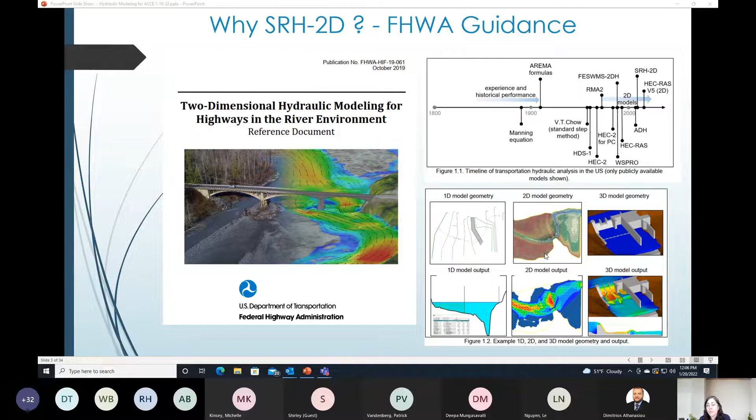So it was recommended that 2D modeling be used for bridge projects. And then in 2019, the DOT, when they updated their hydraulic manual, recommended to include 1D or 2D for fish passage and bridge projects. But under their hydraulic analysis in Chapter 7 for fish passage, they actually require it.

So if you want to work on fish passage projects for the DOT, you're probably going to have to get some training with 2D modeling. And there's an NHI course, which I highly recommend. It's a 4-day course to be able to go through to learn a little bit more.

So this is why it's so important right now than it was 5 years ago. Just the push, and it's just a better way of looking at river systems.

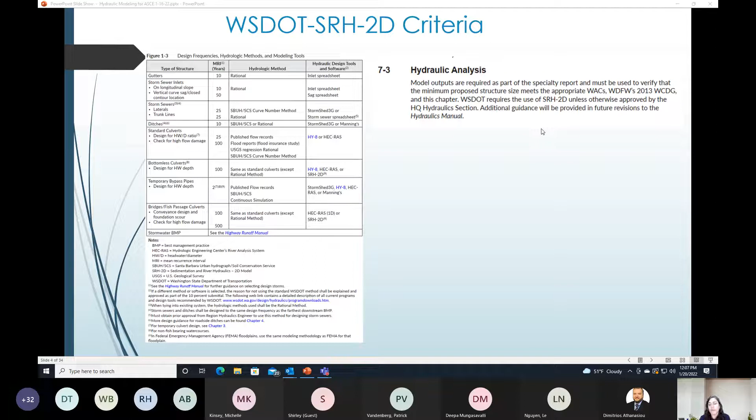So let's take a look at an example project. This bridge project that we're going to look at, we're going to derive some water surface elevations and scour depths using the program. We're also going to check vertical clearance and channel migration zone criteria. There's other components that you typically look at when you're doing a bridge project, but I'm just going to focus on these criteria. This project crosses the Touchet River,

and it flows south to the Walla Walla River. So just kind of some dynamics of the basin area. The existing bridge was built in 1914, and it's 115 feet in length. And the other thing that we know, it was identified to be structurally deficient, and in the bridge inspection report, it was determined that the bridge had a scour critical code of 3.

So now this is kind of giving us a background of what the project is all about. And the biggie is the scour critical code 3. What does it mean? It means that the scour limit is at the footing, and it's unstable. Either assessed, being that you can physically see the bottom of the footing, or it's been calculated that it's going to be below.

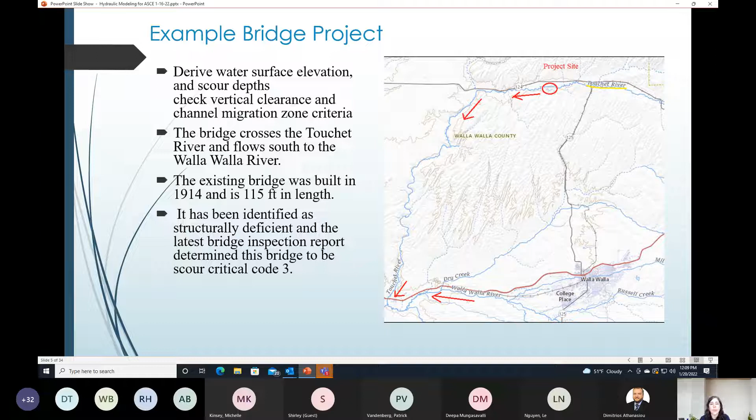So knowing that, something should be done about it, right? Some type of plan of action. So now let's start looking at some bridges or some pictures of the site.

And so we were able to find some archive photos, and this picture here is actually from 1909, before the existing bridge. And so we can see that there's a pony truss structure here, and it spans the main channel. And then we have several bents on either side of the main channel, and then we have a school there. So this just kind of gives us an idea of what was there before the existing structure.

And then we can see where the flow of the main channel, and then we can also see on the right here some side flow that's coming in. So that kind of gives us an idea of what it was before.

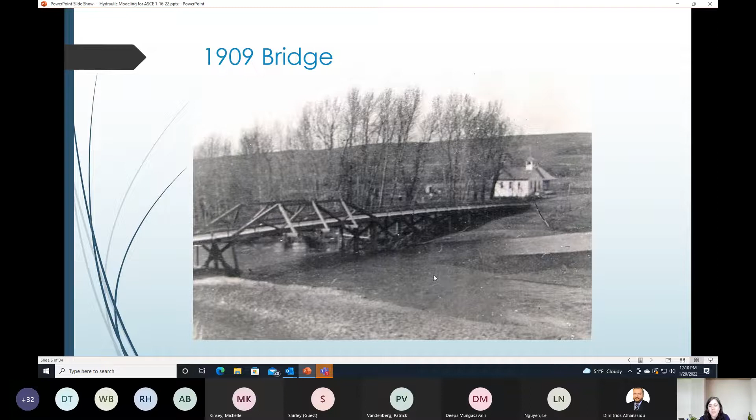Now looking at the existing structure, the 1914 bridge structure, we have a Luten arch now. And it's not as long as the 1909 bridge. The other thing that we see is that the main channel is now, it's meandered on to the where the offside channel was, and this is actually hitting the road approach here.

And so this is a drone shot that was taken of the bridge. And so we're looking at just the components now of the river, of what it looks like now compared to back in 1909, which was great when you can find historical photos of your project site.

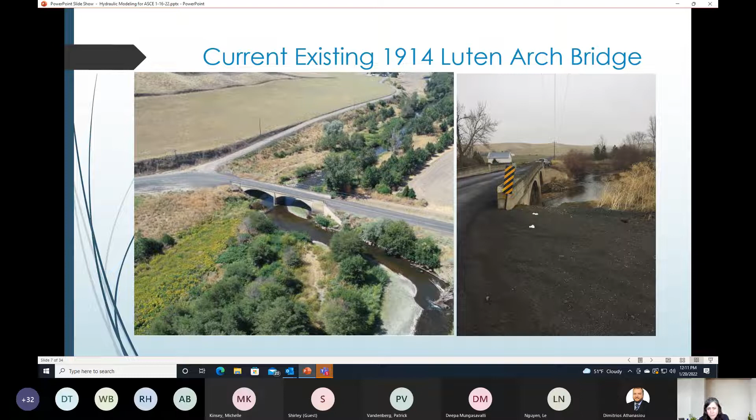The photo to the right here, we're looking upstream, and you can see where the existing school building is, and some buildup of riprap, the bank, and then we got the center pier there. So looking at it, we're just kind of gauging what the site has, and so we're looking at our site conditions. And so what we're trying to do is we're trying to set up, okay, what are we going to need for our modeling?

And so one of the things that we need to look at is, okay, site conditions, right? How big of the basin area are we looking at here? For this particular project, this basin area is approximately 497 square miles. And then we're looking at, does it have any gauges nearby? Does it have a gauge at the bridge site? How far upstream, downstream is a gauge?

The other thing that we look at is finding information about FEMA. Do we have the flood insurance rate maps? What year has it been, do we have an updated year that the flood maps have been defined? And so here in this aerial shot, we were able to overlay the FEMA map boundaries for the 100-year to see how wide the floodplain is.

And you can see where the little school is at. So it has a very wide floodplain for this river system. So again, we're gathering information for our project site. So when we're doing our modeling, we can take into account all these considerations.

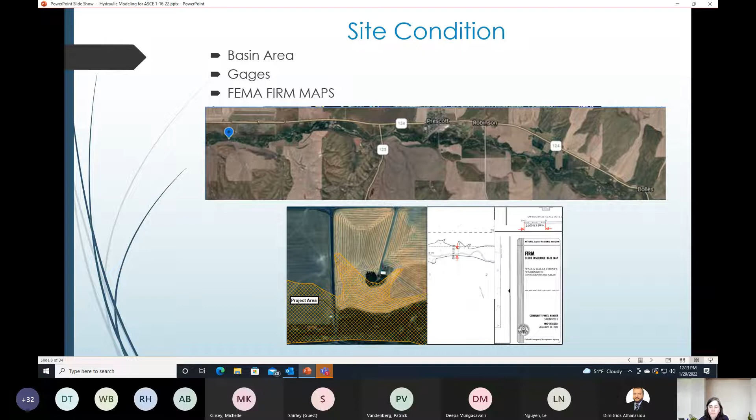Moving along, now we're looking at our hydrology. So we kind of talked about FEMA, but now I'm looking at the FEMA flood insurance studies. And so was there a study done on this river system? And luckily there was a study done in 2002, and so we were able to get flows upstream from the proposed site that we were looking at, a location called Bolles. And so from the FEMA flood study, we were able to get the higher flows at this location.

The other thing that we looked at was what kind of gauges did we have? And so at that same location at Bolles, the USGS had a gauge that is no longer in use, but it was in use from 1925 to 1989. So that was 64 years of record of flows that you could use to generate mean recurrence interval flows. And so when we did that, we found that those flows were less than what the FEMA 2002 flows were at that same location. So that's why we stuck with the FEMA flows and not the USGS flows.

On top of this, we were very fortunate that the DOE had a monitoring station at the same location. My guess is that they just took over the old USGS gauge in 2007 to the present, and was able to capture an event on February 7th, 2020, which was fantastic because now we actually had an event that we could use to validate the model.

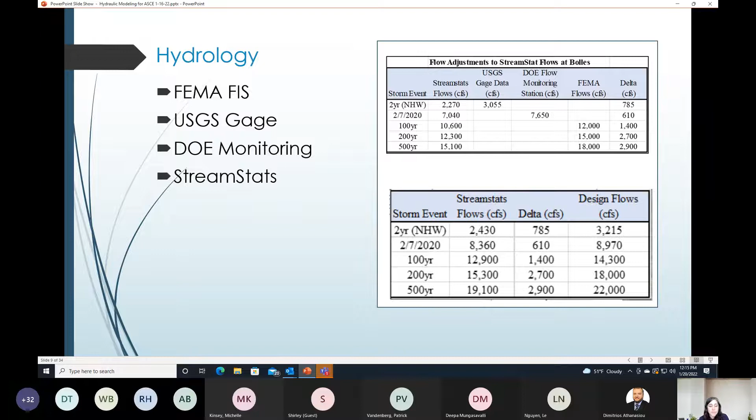So going through our hydrology, we're able to then figure out, okay, what would be our design flow at our stream? Because then these would be the flows that we would use to input into the model. So that's our hydrology, going through all these different forms of information and then putting them together like our puzzle pieces to be able to get the design flows that we're going to need for the model.

Here's that February 7th flow that I was talking about that was able to be captured. So we were able to capture the flow upstream, and then we were also fortunate that the county was able to go out and take photos during the event. They actually missed the peak, and so this was where the flow was when they got there. But looking at the pictures, we were able to see where the high water line elevation was, so we could capture that piece of information, so we could use that to validate the model.

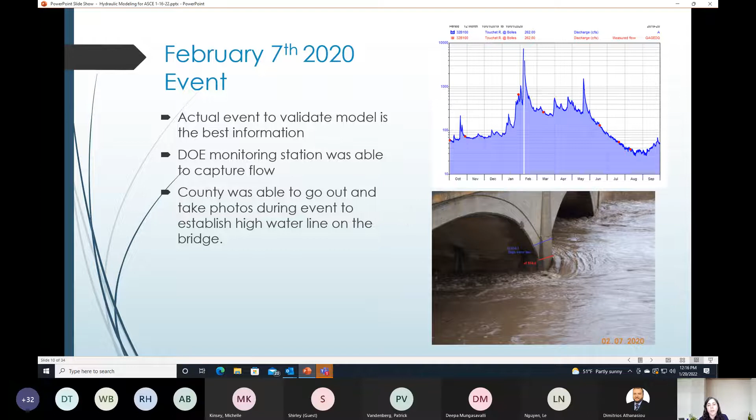So that's wrapping up our flows, and now let's go back to our site condition. Now here we're looking at stream stability. So we're back on our site visit, and we're looking at geomorphic assessment. So we're doing a lot of gathering information still. So I haven't even gotten into the modeling portion of it at all. It's just gathering all the information that is necessary before we can actually go in. And so here we are looking at the geomorphic assessments of our bridge.

And so some of the things that we want to capture when we're out on the site visit is the channel sediment, the size of it, doing a pebble count, locations of the gravel bars, just kind of getting a feel of the size and the movement of the sediment, seeing if it's a flashy system, where the bank erosion is happening. Is it just localized pier scour that we're looking at?

Do we have contraction scour going as well? Looking at high water line, telltale marks, or just anything that we can capture while we're out on the site visit. Seeing if we could actually visually see the floodplain width while we're on the site. If it's really wide, that's a lot harder than if it's a smaller system, but it's something to keep in the back of your head.

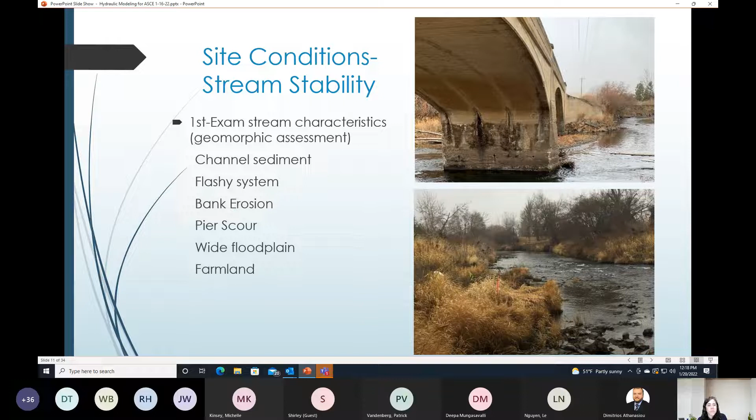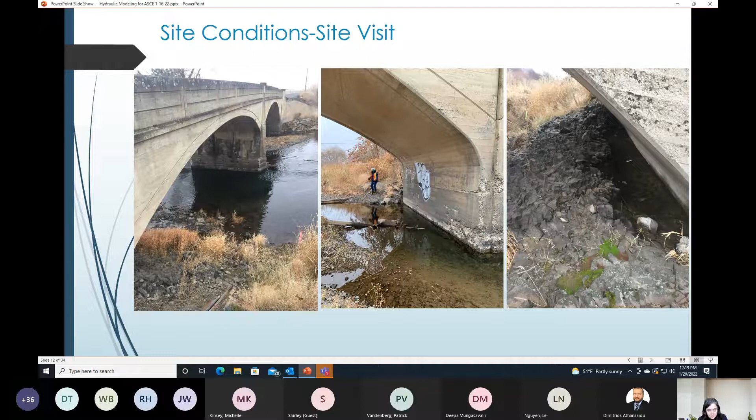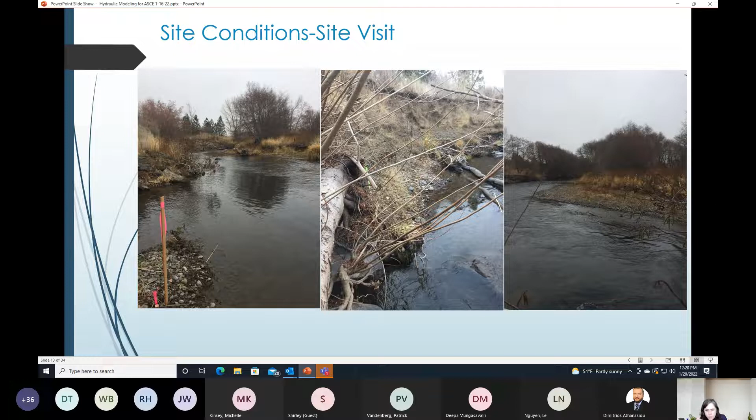Looking across the channel is the overflow area, and you can see the bank lines where the existing tree lines are, the gravel bar, again, trying to get a sense of the shrubs and trees and the roughness of the area as well. So that was the geomorphic.

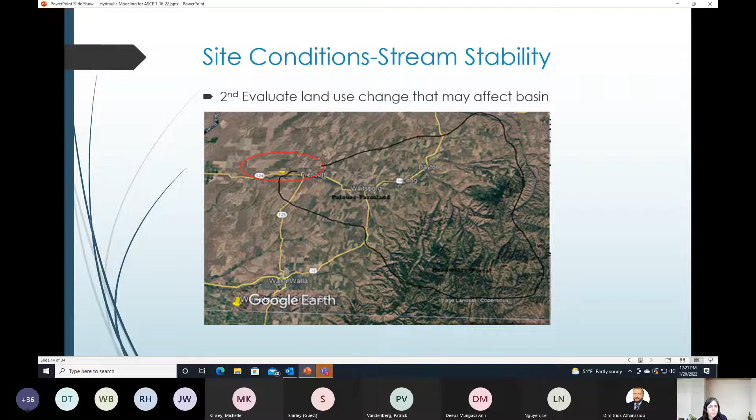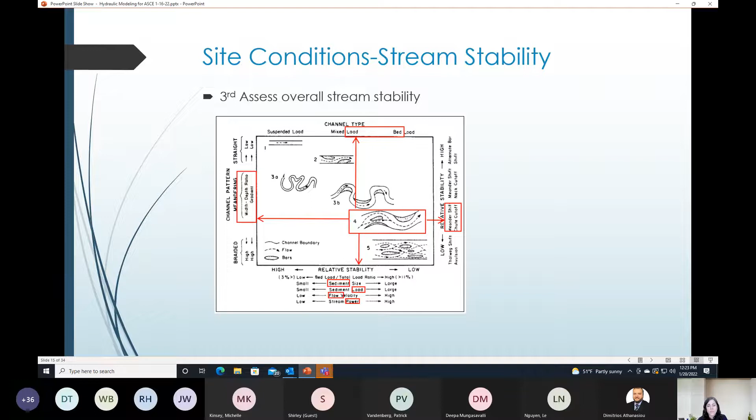Looking at our meanders, are we shifting? Where are we? Are we high, low, braided? Definitely not braided yet, but shifting and cutting chutes and so forth. So definitely in area 4 of this type of stream assessment. So it's relatively stable, but not super stable. Not bad, but not good either. So it's somewhere in the middle. So this gives us a stability of where this river system is at.

The fourth, we have to look at the lateral stability of this system. So how is it laterally moving back and forth? Well, first we need to look at what we call a minimum hydraulic opening, or what the bank width should be, and using a 2-year flood event can help establish what that width would be.

A good way of thinking about this is, when you have a worm, if you hold the head of a worm still, the body wiggles back and forth. That's exactly what a river is doing. The bridge is the constriction point, and the river upstream is just wiggling back and forth, meandering back and forth, and trying to find some stability.

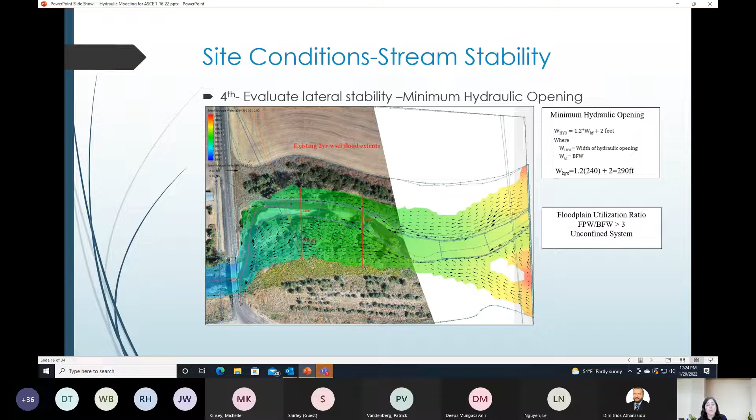So one thing from looking at the stream stability evaluation is that the existing structure definitely needs to be a lot wider based on this quick analysis. So that's one step laterally. The second thing that we need to look at is the channel migration zone.

When the channel has a wide floodplain, it's going to meander back and forth inside of this floodplain. To establish where those limits are on this site, we were able to use older photographs to establish a northern limit and then the southern limit. Closer to the bridge, we were seeing that the channel migration zone was about 345 feet in length. The further upstream you go, some of these were over 500 feet in length.

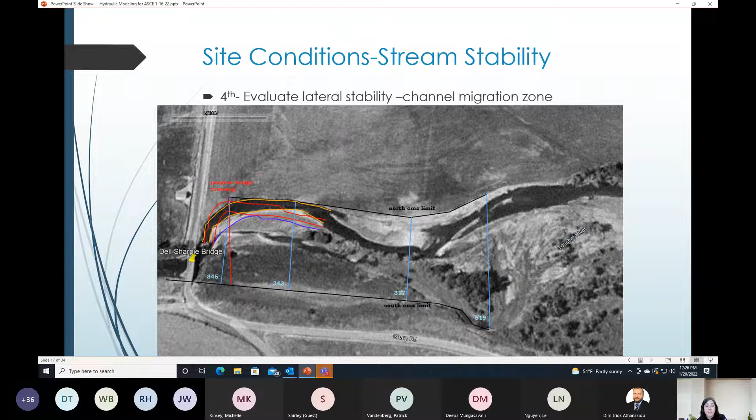So when we're proposing a new bridge crossing, you would probably want to span the whole channel migration zone. It can get very expensive doing that. So as long as you can span that minimum hydraulic opening and know that you're still within that migration zone, then you start looking at other components. These are just some key points that you, as a hydraulic engineer, would have to bring up to the team as critical points.

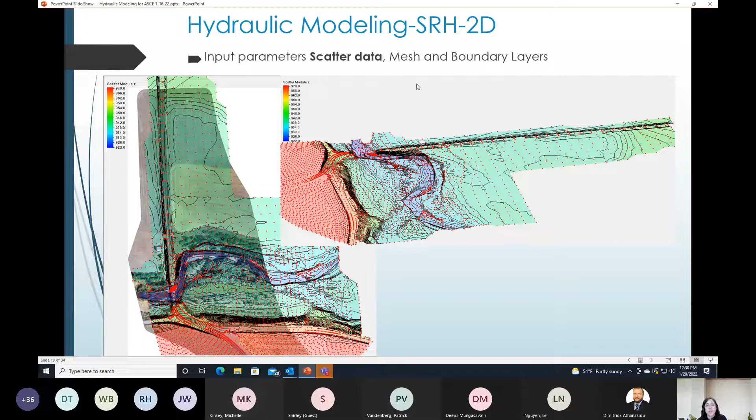One thing I've learned is that using this model, you definitely need to brush up on your surveying skills to understand all of that lingo again, to have a good scatter data map to generate the next step. Once you're happy and you concur with your survey crew that this looks correct, you can go on to the next step, which is the mesh data.

So now when we develop, we're taking that survey and we're dividing up the area of interest in components. And so the area outside of the river, or the furthest away that we're looking at, this mesh area, the farmland area here, doesn't need to be as tight for components, for data, as it is in the river system. So my river system, the way I've defined it, is a lot tighter. So that's why it's a lot darker in those components.

So again, I'm looking at it from a 2D or a plan view versus the 3D view, and you can see the tightness of the mesh here is a lot darker than it is out in the extremities. The tighter you make your mesh, the longer it's going to take to do its computation. And the more points you have, again, the longer the computation, but the more accurate your results will be.

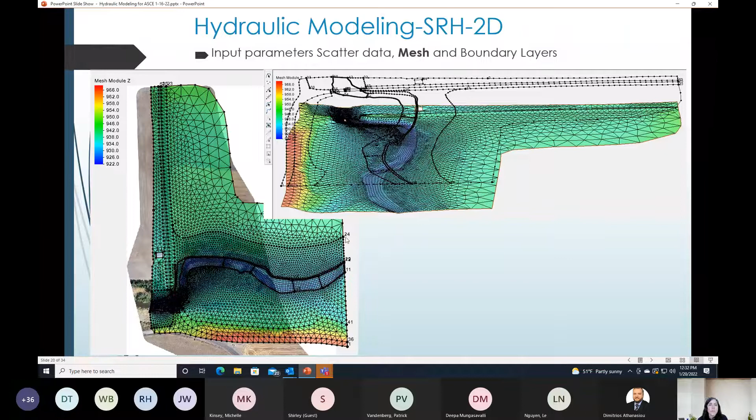And again, if you have any points that are at 0 or are off, you're going to see them once you flip it on a 3D view. So this is our first layer, our mesh layer. The boundary layer is where we define our flows. Now we start inputting our flow information. So we have our inlet. We define where our flow will be coming in, and we can only define one flow at a time, unfortunately. In the 1D models, you can input all your different flows. In the table here, you can only do it one flow at a time.

And then on the downstream side, our boundary condition, we establish it as an exit subcritical flow and define it using normal depth. It uses the mesh that we have defined, and then we can come in and give it a Manning's roughness and what the slope is of the channel, and then we input the flow here as well, and it will generate the downstream water surface elevation for us as a starting point for the model.

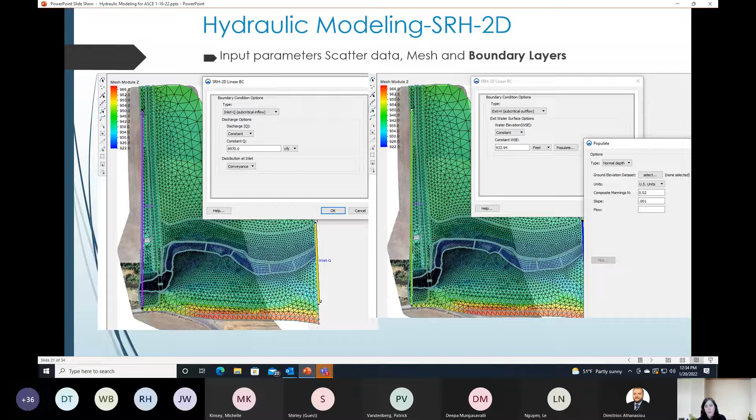So this is the boundary layer condition. We started with the survey, we had the mesh, and now we have the boundary layer component. Moving along, the next parameter that we look at, in the model they define it as material. And so the materials is basically the roughness of the land area. We're looking at how we defined our mesh, and so our materials match the mesh areas as well. And so I've identified the channel as blue. So everything in blue has a Manning's roughness of 0.03.

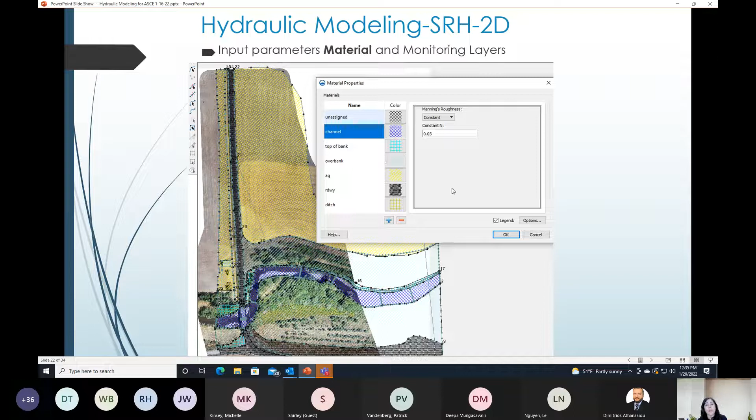And then we have top of bank, which is like an aqua teal, an overbank area, which is where the tree area is at. And then I have all the agricultural in yellow. Our roadway is defined in black. And then I have a pretty big open ditch that I've also defined. So all these areas have a roughness element tied to that. And again, once you come through and define all these areas, then we're able to move on to the next layer component, which is the monitoring layer.

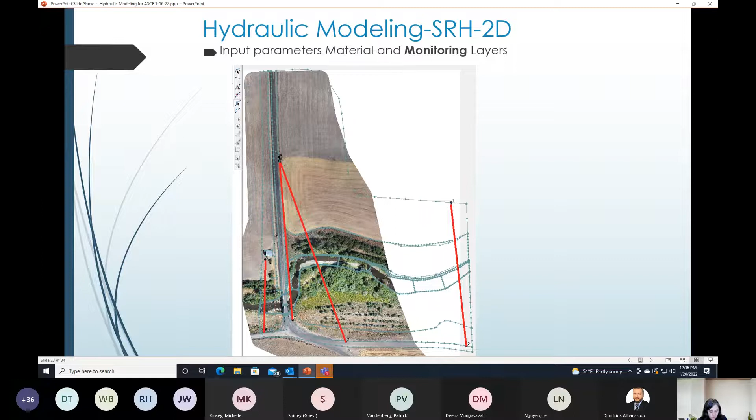So we want to be able to define locations in the model where we want to double check water surface elevation and velocities. And so I chose the downstream side of the existing bridge, right on the upstream side of the existing bridge, upstream of my survey, and then some right before the bend. So these are 4 locations that I have selected to monitor for the model. So these are the layers that we work on in the model in order to then run the simulation.

So once we have those 4 components, the boundary conditions, our monitoring locations, the materials, and the mesh, we can then create this simulation file and run it. As I mentioned earlier, the more data points, the tighter the mesh, the longer it's going to take to simulate your model. It can be anywhere from a minute to 20 minutes, depending on how much information you have going on. And then you can define the number of time steps that you want it to go through and generate flows as well. Here we only looked at 4 hours.

Once it goes through its computation, it spits out the results up above. So we're looking at water surface elevations, water depth, velocity magnitude, Froude number, and stress are the outputs that it generates. And so this is looking at the extent of a water surface elevation, color-coded using elevation. So everything in the red is around 940, yellow is around 937, and green is around 934 in elevation. The other way you can look at it is running your mouse in the area, and it pinpoints and gives you actual elevations that you can look at.

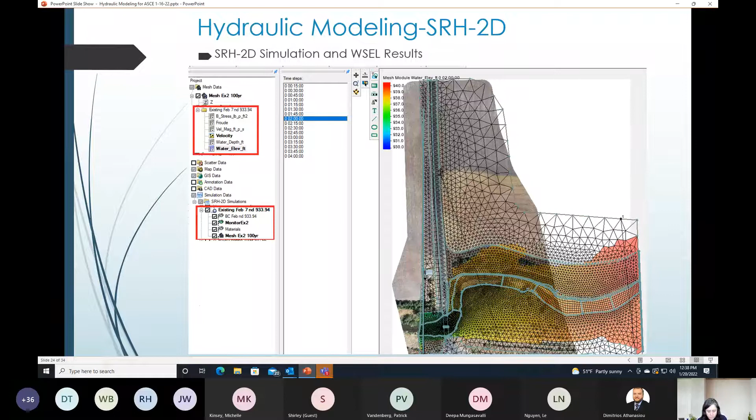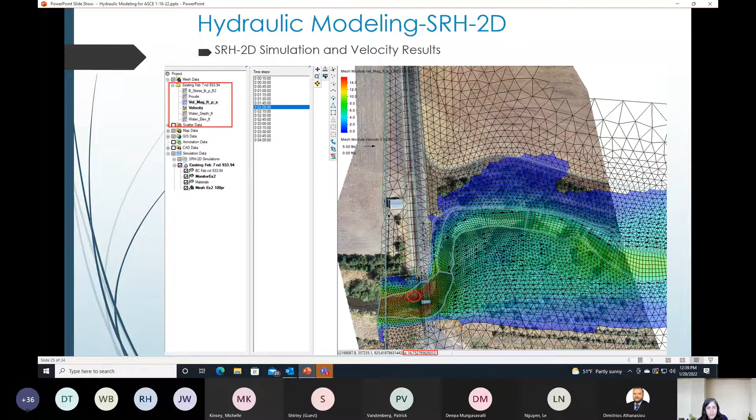Looking at it from a 3D result, again, you can see those velocity vectors as it's flowing in the floodplain out here versus in the channel. And then if I zoom into the bridge area, I can see how it's flowing through the opening.

This event did not overtop the existing roadway, but it definitely reached its banks. And again, you can see the velocity flows based on the color range. Here, we had defined it at every 2 feet per second.

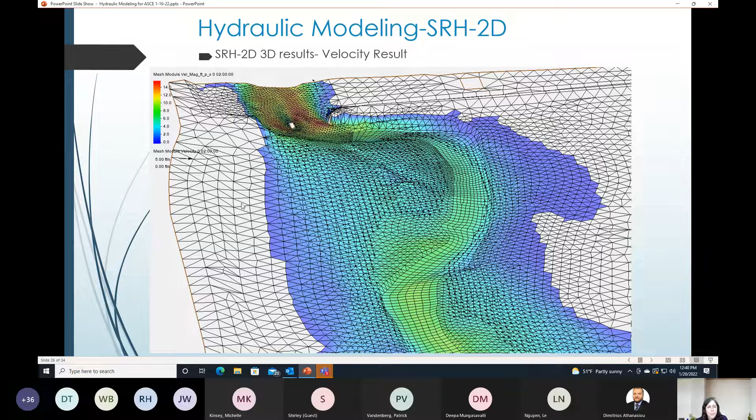Another cool component is you can do some animation and actually see the flow path of the river system, and then we can come back and reverse it. Just another tool to see how the flow is flowing versus just looking at it from those velocity vectors. This is a short clip of less than 16 seconds, but you can go in and change that animation.

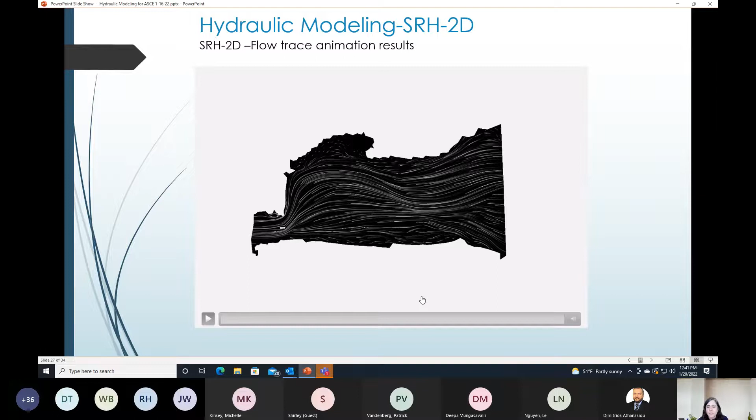The other thing that SRH-2D can generate is profiles. You can tell it exactly where you want to cut your cross section for water surface elevation, or you can also generate water surface elevation profiles. Here we're looking at the cross section water surface elevation at the existing bridge,

and I was trying to capture what the elevation was during that storm event to see if it matched the high water, and what the tolerance difference was between the two. So I was trying to validate the model based on that location.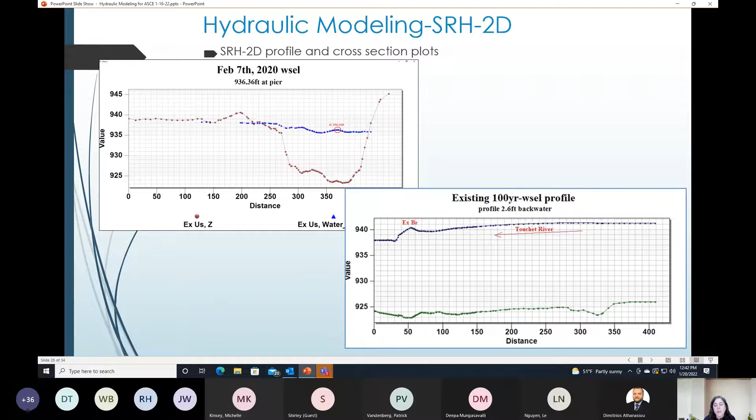I also wanted to see how much backwater the existing bridge is creating. And here we were able to see that it had almost a 3-foot backwater, 2.6 feet of backwater. These are very important pieces of information to bring to the team when looking at hydraulics. The last thing that I wanted to talk about is the vertical clearance issue.

And you can also see how the water surface elevation drops down as it comes through, so it's a little bit higher for the 100-year. This is huge in the difference between the 1D and the 2D, because a 1D could capture just the higher elevation and extrapolate it all the way across, or capture something average in between, and it would be a constant elevation versus what the 2D model is actually showing us. So again, just something to take into account.

And in some systems, 3 feet might not be enough. You might need 6 feet of clearance because of the amount of debris that's coming down the system. Or if it doesn't have very much debris, then you could be under 3 feet and do some engineering justifications on that as well.

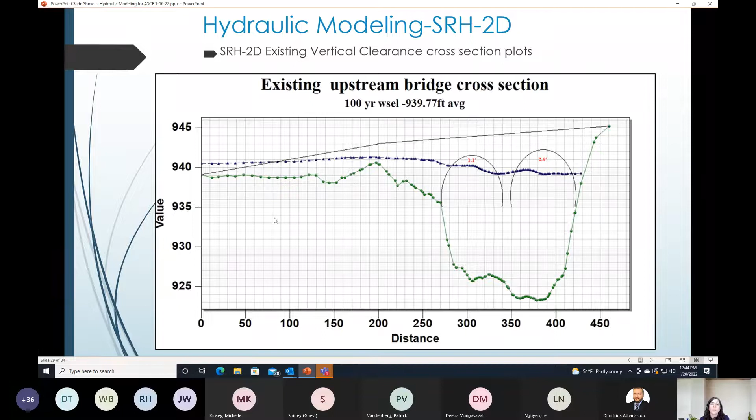So the last thing that I was going to discuss was bridge scour. That's another feature that the model can generate output information for. It's called bridge scour, and it's under the map component features.

The very first thing that you need to do is define your bridge scour attributes. Basically there's 6 components, and you're looking at the contraction section - that's the bridge that you're defining, that contraction section that you're looking at.

The second component or attribute is the approach. Here is the red line - this is the flow approach, the width that you're looking at.

Then you got your center line of your river system. You have your bank at the bridge location, and then the toe of the abutment. And then if the bridge has any existing piers that you want to be able to define.

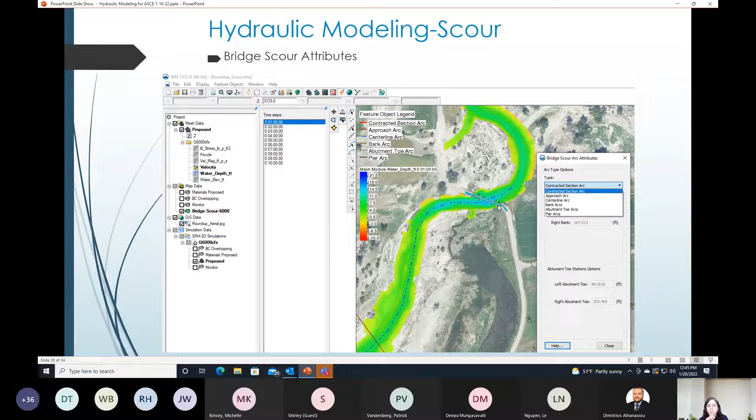Once you've defined these attributes, then you go to the next step and start inputting information about your soil, the sediment size, and your pebble count that you got when you were out on your site visit or from the geotech report.

The mesh that you used, the water surface elevation that it generated, the water depth, the velocity files, and then what type of contraction scour approach you want to look at, and the abutment scour conditions you want to look at - the name of the file, where you want to place the name of this output file.

Then do a quick view of what the file is, and then export it - export this file to the hydraulic toolbox.

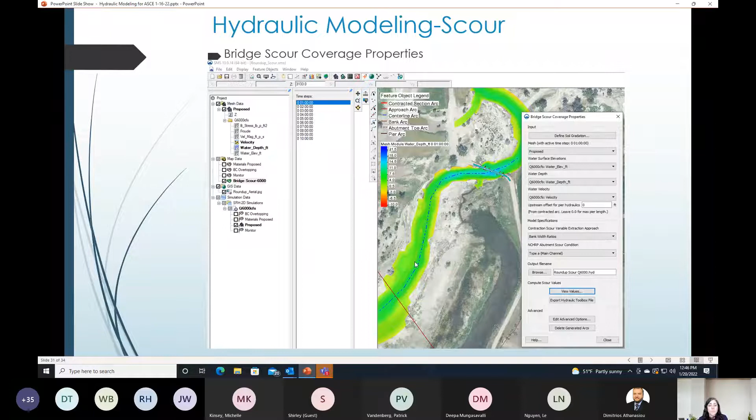So now we're looking at the hydraulic toolbox, which is a different software program from the Federal Highway Administration that I would say the majority of hydraulic engineers are using these days. And Bridge Scour is just one component.

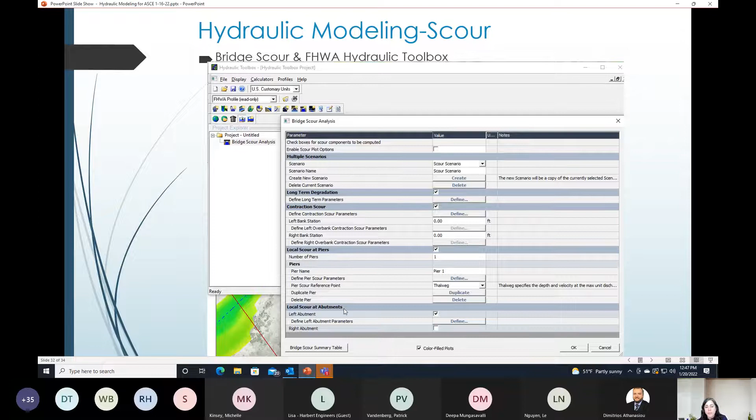If you input the file in here, you want to make sure to double check the information that is being inputted, because sometimes things get lost. So you just want to redefine everything, that everything is correct for your long-term degradation, your contraction scour, your pier scour, and your abutment scour components.

You then run the computation, and it generates a summary table for you of what the scour depths are, and it could also generate a plot preview of what those scour depths are.

Again, this is a side software program, not in the SRH-2D model, but it kind of goes hand in hand with it. So it generates a file that you can input into this other program.

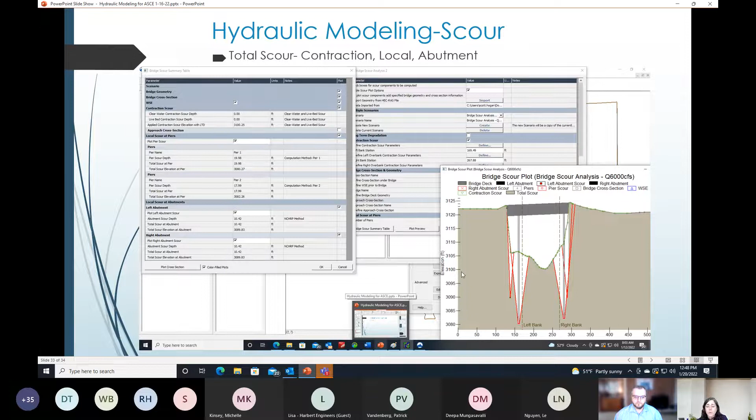So that, in a nutshell, is my presentation. It's a lot of gathering of information to be able to run the model, but working with the team to provide those hydraulic conditions - working with the geotechs, the bridge designers, the civil roadway surveyors, the environmental folks. It's a lot of fun. I enjoy it a lot, and I'm happy that I was able to provide this presentation to you today.

And if you have any questions, I'd be happy to answer them.

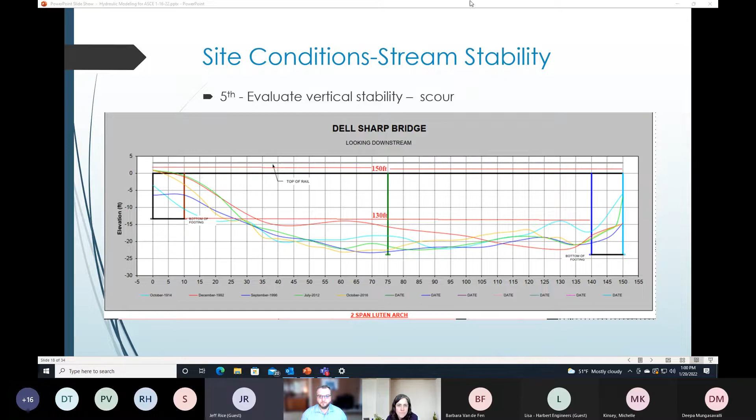Well, thank you. This is Jeff Rice. I'm a recently retired engineer, moved down here from British Columbia. And I thank you for your presentation—it's really interesting to hear what you folks are using down here for hydrotechnical design.

I just wanted to follow up on the questions that Dimitrios was asking. Does WashDOT not require you to look at some sort of climate change approach to design flows for the future? If they're going to put in a bridge with a 50 to 75-year design life, it's highly likely that the frequency curve—just to pick a static view of it—is going to change over that time. The historical conditions aren't likely to last. So I'm curious if that's not the case, or if they're thinking about it, or what you might know about that.

No, they do. They do have a historical flow event that—I can't think of it off the top of my head right now—but it takes into account. They do have it.

Okay, but they don't require you to use various methods for forecasting, or projecting into the future, how, for example, the 100-year flow might change? If right now that's 100 CFS, perhaps in 50 or 75 years that might actually be 150 CFS—that changes completely the dynamics the bridge is encountering.

Correct, yes. But they do have a criteria in there. I'm not with the DOT anymore, and again I just can't—I would have to look it up and let you know. But they do have one.